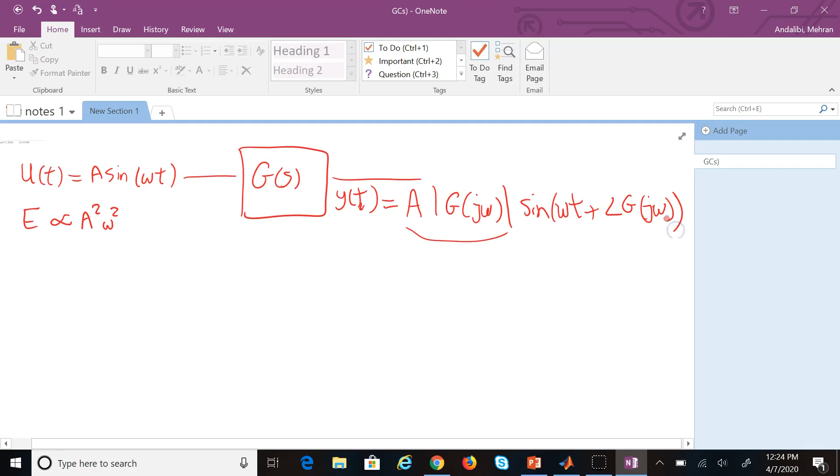We learned that for a linear system, when we pass to it this u(t), if this is G(s), the output y(t) is going to be something of the same frequency. The linear system does not alter the frequency, and the magnitude of the output is the magnitude of the input times the magnitude of the transfer function. It has the same frequency but a modified phase, where the modified phase is the phase of the transfer function at that frequency. So the frequency of the output and input are the same. The only thing that is modified is the amplitude.

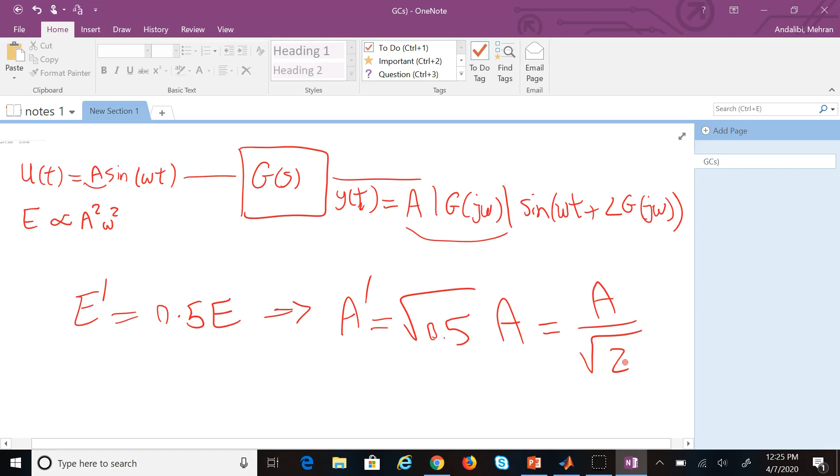So when we say E prime is half of E, it means what? The amplitude prime is how much? How much should you modify the amplitude to make the energy drop by 50%? Well, 50% means 1/2, and since E is proportional to the square, it is going to be the square root of 0.5 times the original amplitude. And the square root of 1/2 is 1 over square root 2. So we can write it like this, and 1 over square root 2 is 0.707. So if the amplitude drops to about 70%, 71%, then the energy of the signal drops by 50%.

So now this number means what? If I take the log of both sides, 20 log base 10 of A prime is 20 log 10 of 0.707 times A. And since this is a product, you can write it as an addition of logs. So it is going to be this plus this. And how much is this value? If you calculate it, this is -3.

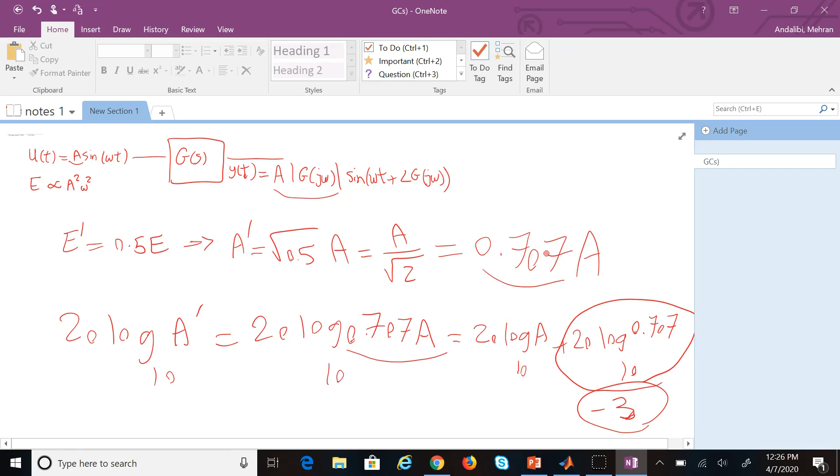So that's why we say whenever the magnitude of the signal drops by 3 decibels, that means the amplitude dropped to about 70%, or the energy dropped by 50%. Okay, so that's why we have this number 3 here. 3 decibels means a 50% reduction in energy.

And so now the terminology: the frequency at which this 3 decibel drop happens, compared to very small omegas, is what we call the cutoff frequency. And the range from omega of almost 0 to the cutoff frequency, this band of frequency, we call the bandwidth. Okay, so that's the definition of cutoff and bandwidth.

And one important thing is the bandwidth is related to other things that we learn about the performance of a system, transient performance characteristics, like what? Like the rise time. So one of the important things is that the rise time and the bandwidth are inversely proportional.

So if you change the behavior of G of S by changing what? The damping ratio. So if I make the damping ratio larger, right? So I am going to make the damping ratio larger. What happens when you make the damping ratio larger? You're raising the rise time. In other words, you're making the system slower, but the bandwidth also increases.

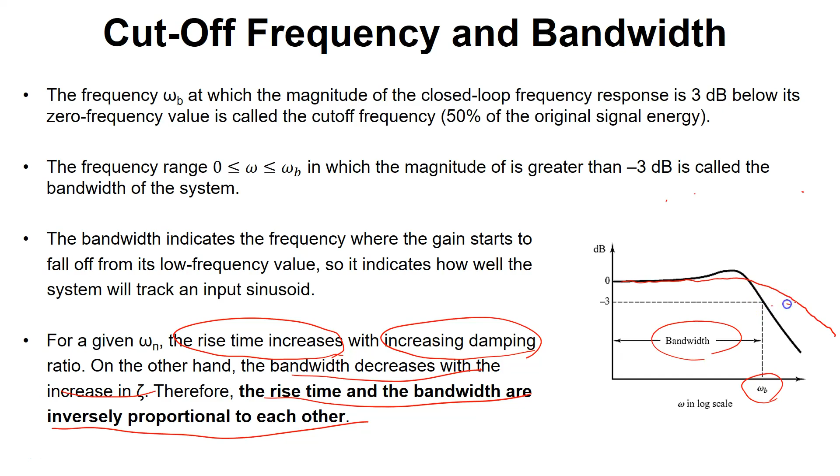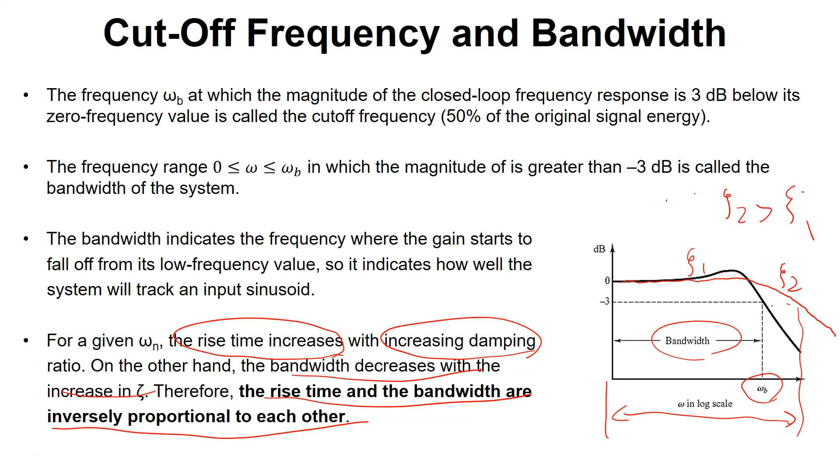So the more damping you have in the system, the bandwidth increases. In other words, this drop happens at a later frequency. Instead of this, it's gonna go like this. And here is where you have 3 units drop, and so that is gonna be your new bandwidth. So if this is zeta 1 and that is zeta 2, I can say zeta 2 is bigger than zeta 1. I added more damping. I could get a larger bandwidth, but at the cost of making the system slower. Okay, so these two are inversely proportional.

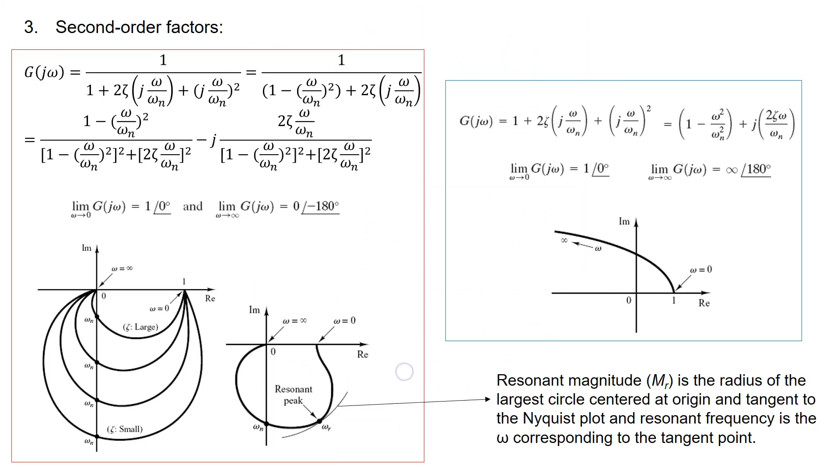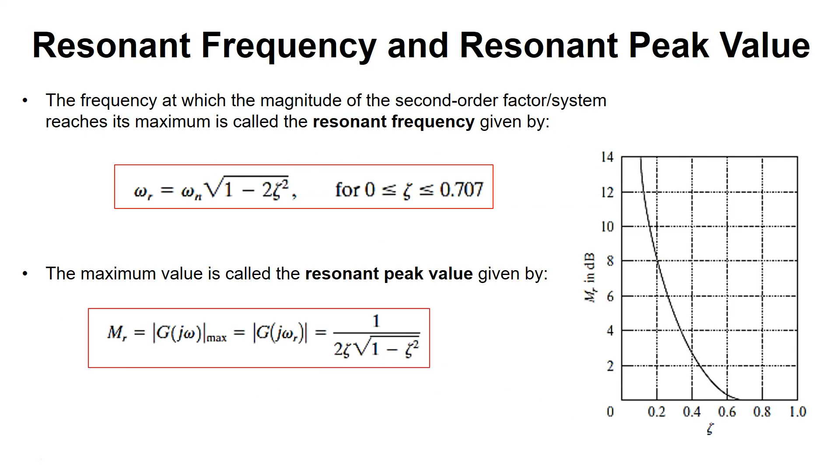Now, how can you get the bandwidth in Matlab? I'll show you. Also, we learned in the past about resonant frequency and resonant amplitude, right? So we learned them, where was that? Here. So we learned about omega r and Mr, resonant frequency and resonant peak value. Is there a way that we can find them also in Matlab for a system? Yes, the answer is yes, we can do that.

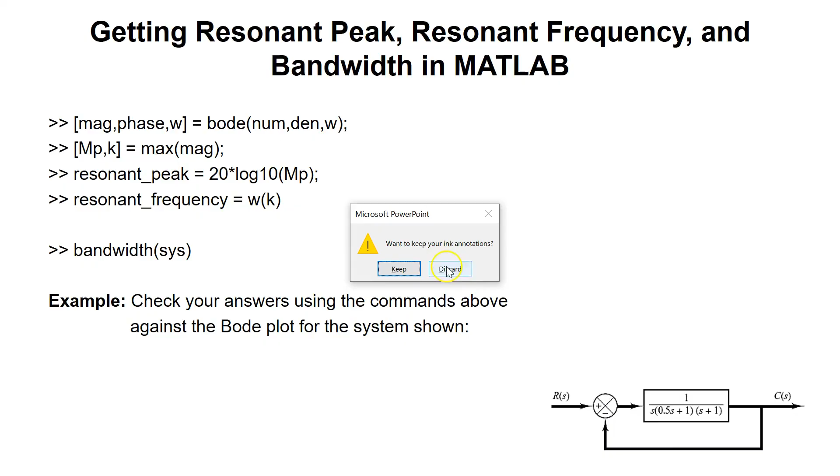And the commands we use is, first, in the past we didn't have it, but now they have added this. There is a command in Matlab called bandwidth, so we can directly apply that, right? So if we look at the system here, s times 0.5 s plus 1 and s plus 1, right? So let's look at this system.

So if we define that transfer function, we say the system is the transfer function of, in the numerator we have 1, in the denominator we have convolution of 2 things. One is s times s plus 1, which is 1, 1, 0. And the other one was 1 and 0.5, I assume, right? 0.5 s plus 1. So I multiplied s by s plus 1, and now I'm multiplying it by 0.5 and 1. So this is the transfer function that we have, and now we can directly run the command bandwidth on it.

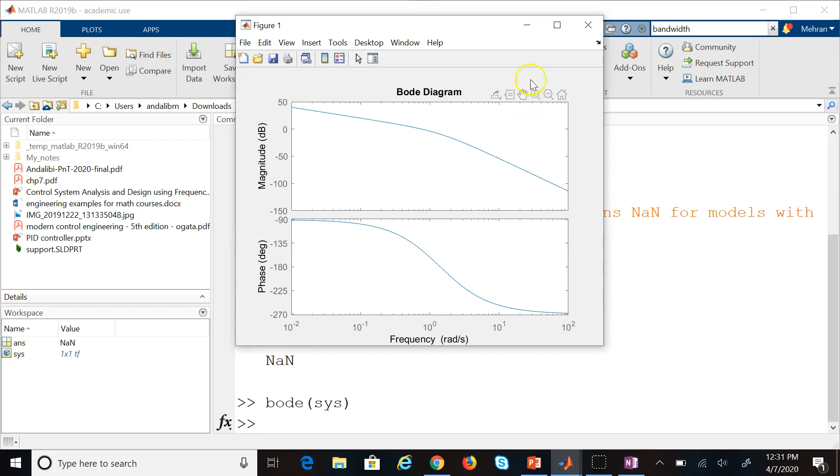And it says the bandwidth is NaN. Okay, that's quite interesting. What does it mean? Bandwidth is NaN. So let's do the Bode command. So we say do the Bode plot of the system. And if we look at the Bode plot, we should be able to find it here. Okay, so this is the Bode plot. It says NaN, but that's not necessarily true.

So let's go back and look at the definition again. It says the frequency in which the magnitude is greater than negative 3 decibels. Okay? Yes, or 3 decibels below its zero frequency value. So if we go back and look at the Bode plot, here we are at something less than 50 decibels, right? Let's go and check it.

So if we use data tips and move the mouse, at low frequencies it doesn't seem to go any closer. That's the closest it goes, for 0.02. So it is like 34 decibels or so, although we can zoom into that area. If we zoom in here, you see that the actual value is like 43 or 42 decibels. So once we go down 3 decibels below it, which is like 39, wherever we are at 39, that should give us the bandwidth. And here you see it's already 34, so the bandwidth is really small for this system.

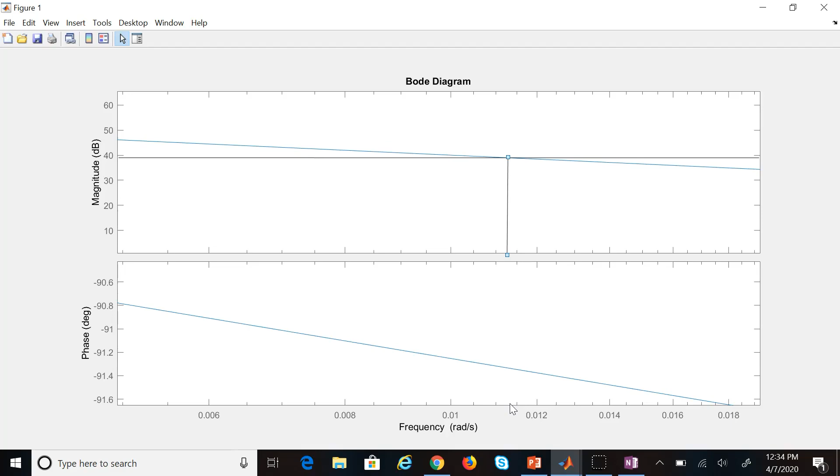So you can use another line and project this down here. And you see this is roughly around 0.011 or so, a little more than 0.011. So that is the bandwidth, okay? So it's a low bandwidth. That's probably why it returned NaN, because it could not zoom in to this. You see that the smallest frequency I had was 0.02 and the bandwidth was less than that, so it could not find it. So NaN here really means I couldn't find it.

But if I change this to something a little simpler, maybe this one, let's see if this one does any better. So if I run bandwidth with this, again, that's NaN. Let me change the transfer function to something different.

There we go. Okay, it's about 2 hertz, right? So if I change it to this transfer function, the bandwidth is 2 hertz. And now if again I do Bode plot for this system and I go find that frequency, go 3 decibels below, you see that at about, that is 1, that is 2. This is roughly at 2 hertz where I dropped 3 decibels below the stationary value. Okay, so this is the bandwidth.

The other thing that you want to learn is finding the resonant frequency and value, and we get those through the Bode plot. Okay, so we can either directly click on the Bode plot and find it, or we can use the max command. So we can use a fine range of omegas, because again, if you look at this Bode plot here, can I find it from here? Absolutely, right? So this is the peak value, and I use my data tip again and try to find it.

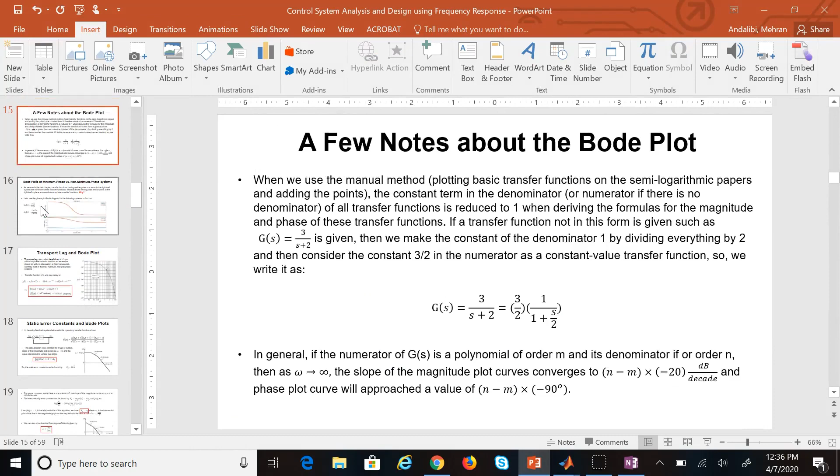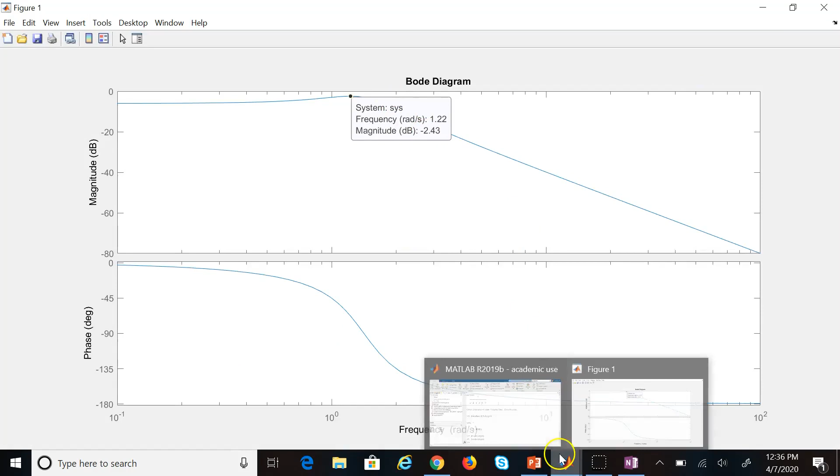So that's not that MR that I showed you here, right? That's MR that you saw here. This MR is without taking log of it. So if I want that value in this system, then I have to convert that decibel, which is -2.43, back into normal. So how do I do it? That's 20 log of that number. So first I divide this number, this -2.43, by 20, and then I raise 10 to the power of that, okay? This is how you go back from decibel to simple magnitudes.

And this is the magnitude, 0.756. So for that system, this MR is 0.756, and I guess from that you can also estimate the damping ratio of that system too, right? Of course, this is a standard second order system, and from a standard second order system you can also calculate the damping ratio, but many times you do not have the analytical model of the system. All you have is a Bode plot that you acquired experimentally. And so from that, then you can calculate all of these numbers and then calculate damping ratio and so on and so forth.

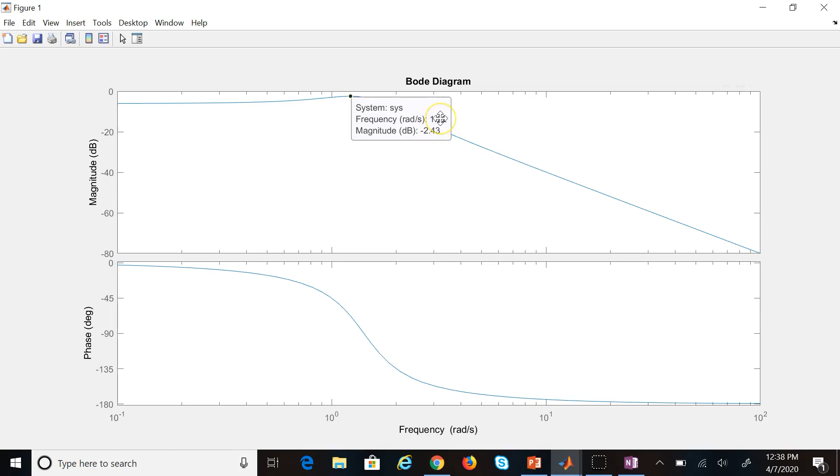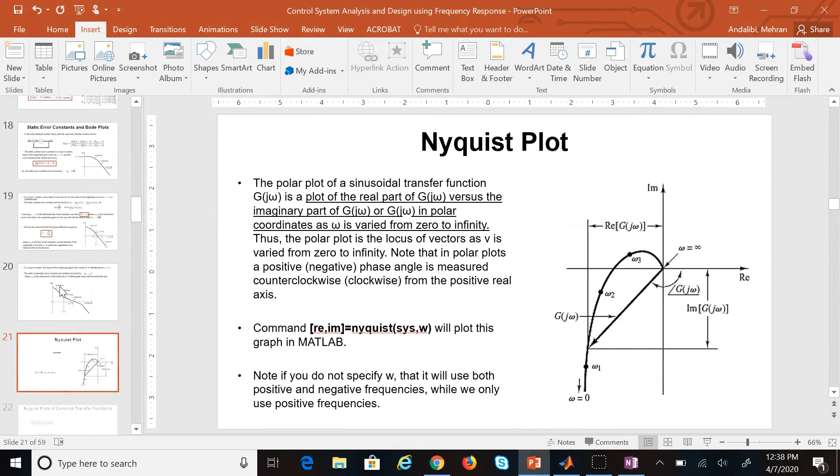So without giving you any physical model, I can just give you a graph, and then from that graph, as I told you in the past, you can obtain a ton of useful information. So that's one way you can get the magnitude and frequency directly from the Bode plots by clicking on it. But what if you want it to be automated without you clicking on the plot? Is there any way to do it through code directly and you do not interfere?

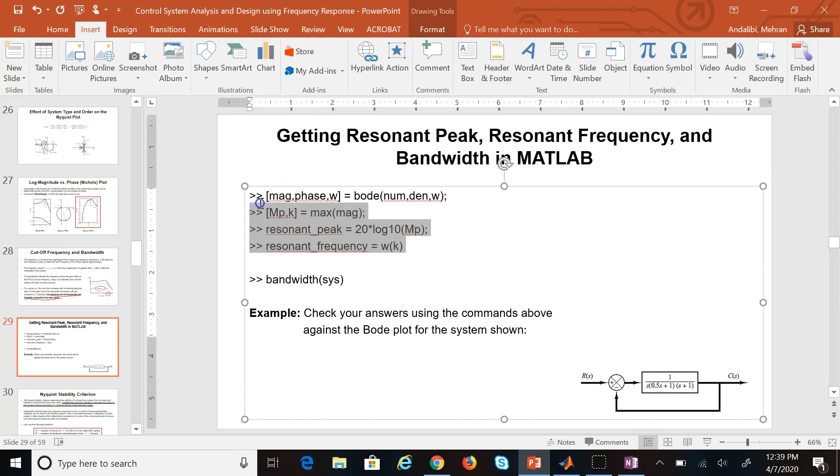Yes. As I said, you define a fine value for vector omega, you pass it to the Bode command and get the magnitude and phase, and then look at the magnitude. Get the max value of the magnitude, and then get the frequency of the magnitude, right? And then omega at which the max is happening is resonant frequency, and 20 log 10 of that amplitude is the resonant peak. So I can easily do that here.

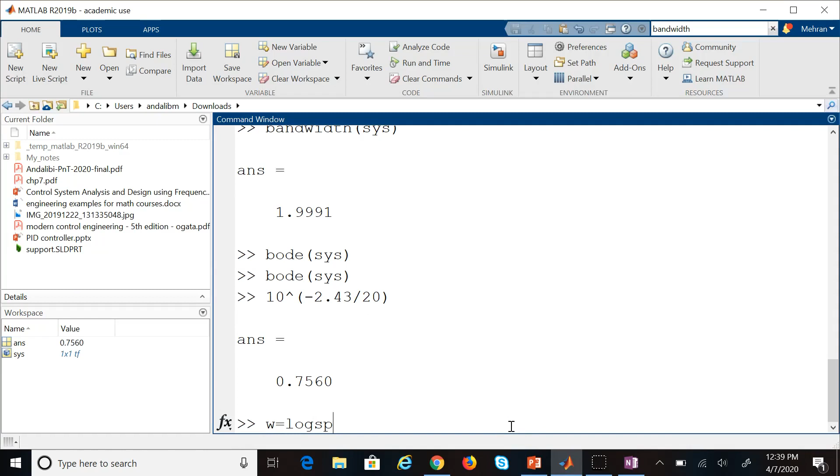And I say frequency is anywhere between, let's say, 0.01, and I can use log space. If you remember, it's better to use log space. So log space of -2 to 2, and maybe 1,000 points. So let's use a lot of data points, and then, oh yeah, there we go. Then here, I already defined the system, so I can use sys and get the magnitude and frequency. And now you run the command max. Now look, I have to remove semicolon.

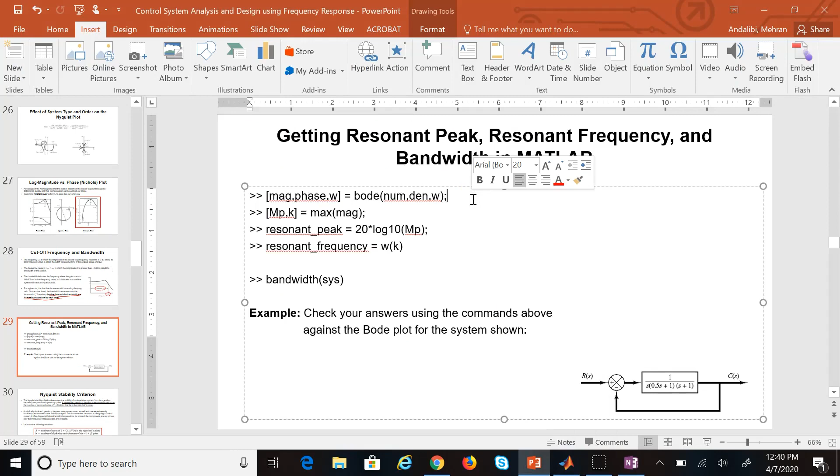So look at that. Resonant peak is -2.43, which is exactly what we found from the Bode plot. And then the resonant frequency is omega at k, which here you can see is 1.219, which is very similar to the 1.2 that we found, okay? So you can do it through this as well, completely automatically. Good. Now that we have seen these topics, let's start Nyquist Stability Criterion.

By the way, before I started, I just added for you this logspace command. I mentioned it in the past, but it's good to see it one more time. And then that formula I just mentioned: if you want to convert decibel to magnitude, that's the opposite of 20 log10. You divide the decibel by 20 and then raise 10 to that power. Okay, so I added that to your lectures.

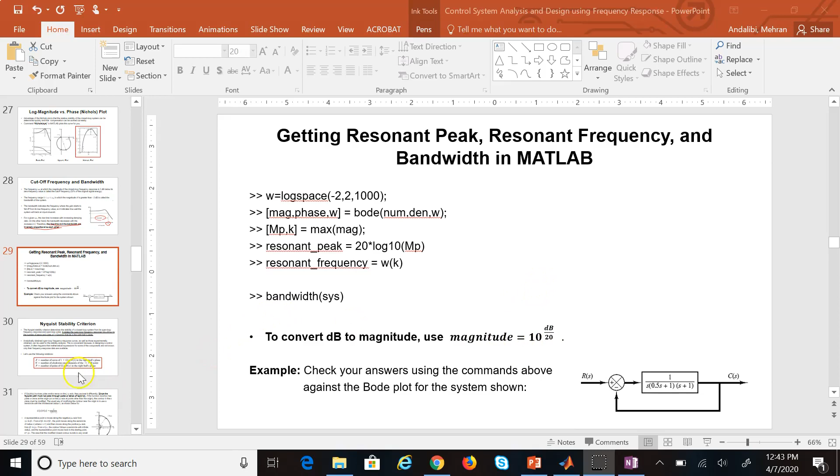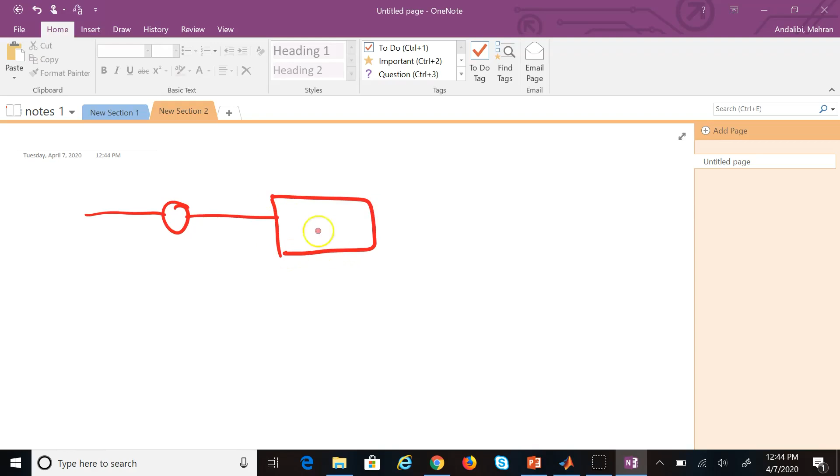So now, what is the Nyquist Stability Criterion? The Nyquist Stability Criterion says this: I can look at the Nyquist plot of GH, which is the open loop transfer function, and I can tell you whether the closed loop transfer function is stable or not. And that is a big thing, right? Because if I have this system where G is the feed forward and H is in the feedback, and this output is Y, the input is U,

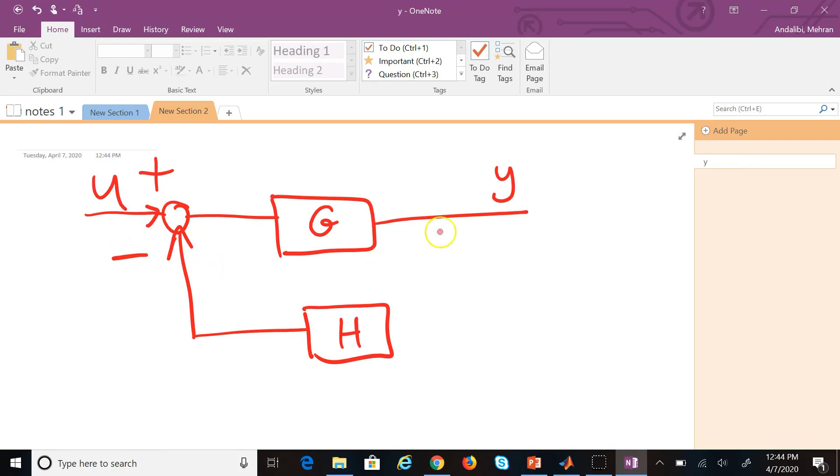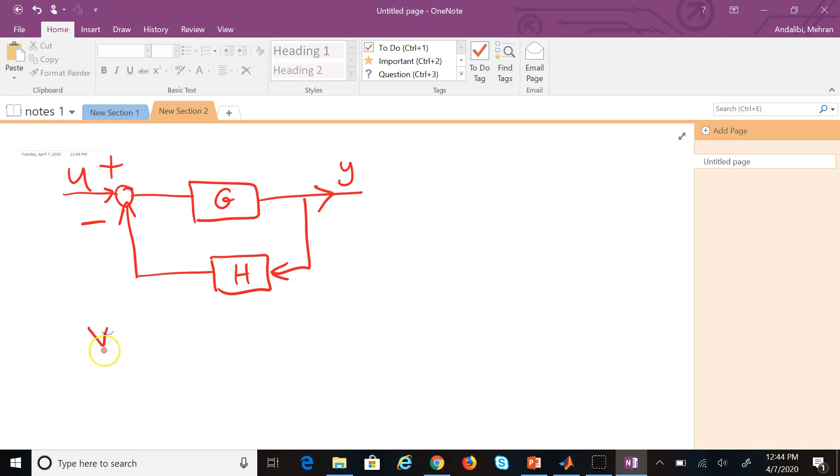then what we really need to know in order to see whether the system is stable or not is Y of S over U of S, which was G over 1 plus GH, right? So I had to look into the denominator of this. When we set this equal to 0, we call it the characteristic equation. And if this characteristic equation has any root on the right-hand side of the imaginary axis, we say the system is not stable. So to determine stability, we have to look at the denominator of this transfer function.

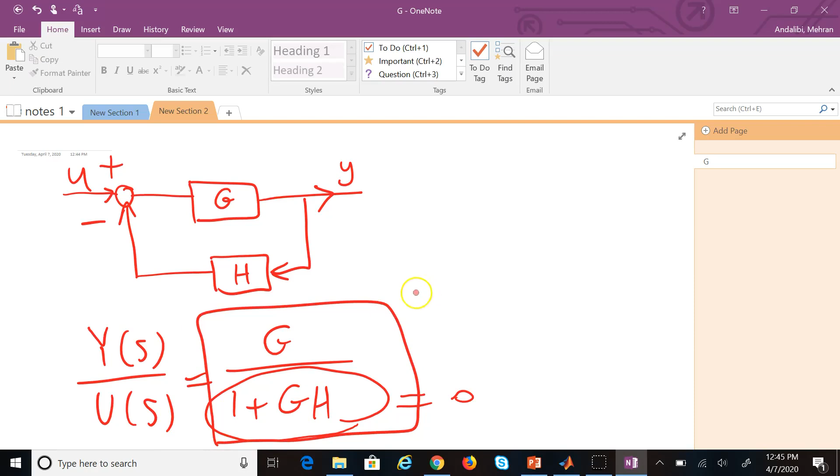And what was this transfer function called? It was called the closed loop transfer function, right? So we have to look at the closed loop transfer function. But now the Nyquist method says you don't need to look at that. All you need to look at is this guy here, G and H multiplied together. If you just look at the Nyquist plot of this, what we call the open loop transfer function, and the denominator of it,

so it's a ratio, it has some poles. If you have the Nyquist plot of that plus the poles of that, I can tell you whether this characteristic equation has any roots on the right-hand side or not. So by looking at the open loop transfer function, you can tell stuff about the closed loop transfer function, and we use the Nyquist plot that we learned. So how does this method work? Well, this is how it works.

What we do is we define a Nyquist contour, and then we map this Nyquist contour into a new plane called the GH plane, and then look at that. So what do I mean by it? This is the part where you need to know complex numbers and mapping of complex numbers. I don't know how in depth you went into complex numbers, but

Good. Now, what does this contour have to do with the Nyquist plot we learned in the past? Well, if you look at this portion of the Nyquist path, this guy on the left side we call the Nyquist path, this is where S is equal to j omega, right? And when I plug S equal j omega into GH of S and plot the polar plot of that, what do we call the polar plot of GH of j omega? We call it the Nyquist plot.

So the Nyquist plot is the projection or the mapping of this radius here. What about this one? What does this one do? What is S over here? S here is also J omega, but omega here is what? Negative. Omega for the top portion is what? Positive. Remember I said that we do not really use negative frequencies in this course until we get to the Nyquist Stability Criterion, which is here.

So this portion is again the same as the Nyquist plot, right? Because we plug in S equal J omega into GH, correct? But we do it for negative frequencies. So I would get again a Nyquist plot, but for negative frequencies. And it turns out that the Nyquist plot for positive and for negative frequencies are the same as each other except for a mirror image.

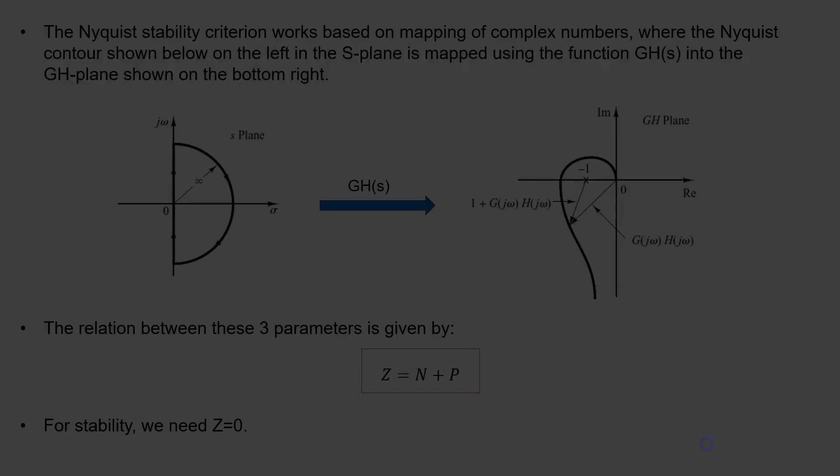So if we have this contour, the entire contour could look something like this. This is one real example where this is the Nyquist plot of this transfer function, this is the Nyquist plot for negative frequencies, and the big arc is mapped to the origin. So this is the GH plane for that system. Looking at that, can I tell whether the closed loop system is stable or not? First, let's learn some terminologies.

Nyquist says, let's call the number of poles of GH on the right side of the S-plane P. So the open loop transfer function has so many zeros and so many poles. How many poles of GH are on the right hand side?

We call those P. We show it with parameter P. N is what? N is the number of times this mapped version of GH in the GH plane, this contour, is encircling this specific point -1 and 0. How many times do you think that contour is encircling this point in a clockwise manner? Right now, this point is outside this contour, so this contour has never encircled that point. So N here is what? 0.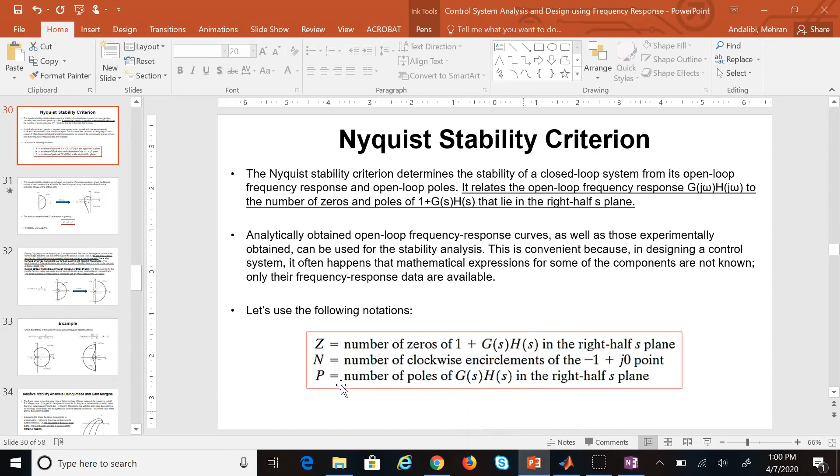What is the condition for the system to be stable? Yes, I want Z to be 0. I do not want any root on the right hand side. I don't want a positive number for Z. Now, how can I find Z based on those two other parameters, N and P? N was the number of clockwise encirclements of the specific point -1 and 0, and P was the number of poles of the open loop transfer function, which I can just look and find out.

It says Z is equal to N plus P, and there is a ton of proof behind this, of course, but right now we just accept that Z is equal to N plus P. If you want more proof, you can always refer back to your textbook. So now, if I go and look at this example with you, there are two systems here.

For the system on the left, how many poles of GH do you see on the right-hand side? Where are the poles for this system? The first pole P1 is at -1/T1, and pole 2 is at -1/T2. Clearly, none of them is on the right-hand side. They are both negative. Here we assume the T's are positive numbers. So there is no pole of this open loop on the right-hand side. So the parameter P in this case is what? 0, none.

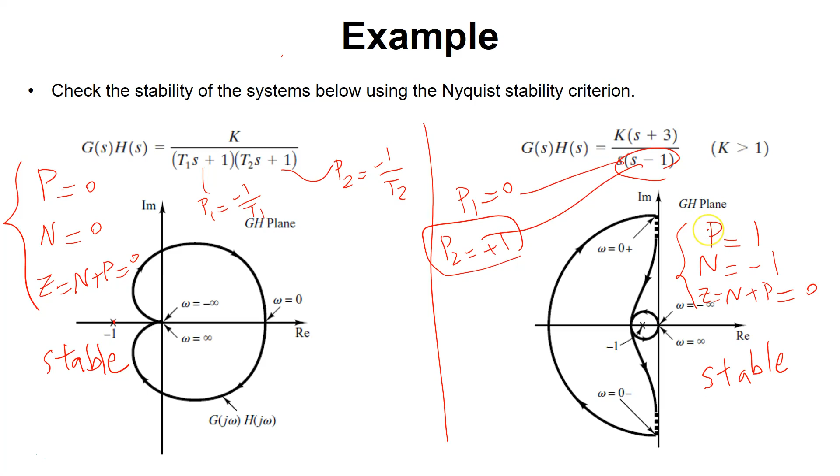We have to do what for this system? We have to form G over 1 plus GH and then look at the roots of this guy and see whether this one has any roots on the right hand side. That is instability, not just GH alone. Here this one that is added would change everything. Okay? Because it brings the denominator of that and will add it to the numerator and will completely change the polynomial. Okay, so please keep that in mind.

Again, one last time, the GH alone does not determine stability. It's 1 plus GH that does determine the stability, and the number of zeros of that, when I say zero, I mean root. Let's not confuse you. The number of roots of that on the right hand side is z. If z is positive, then the system is unstable. For both of these cases, the system is stable.

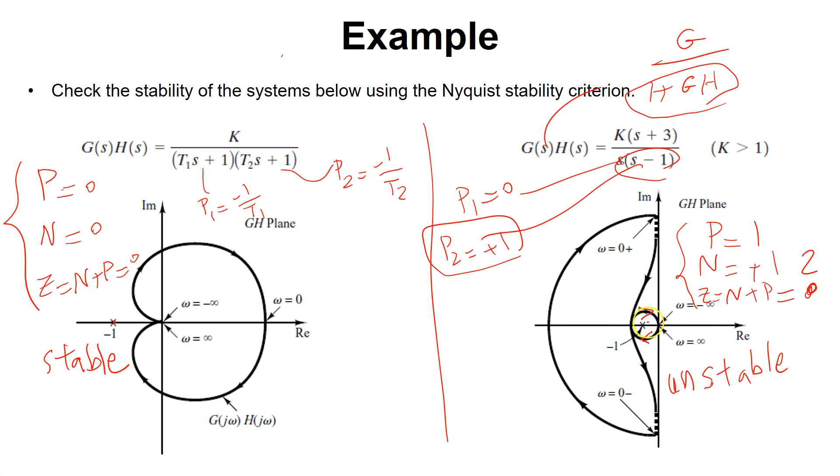But let's say if when we did this GH plane, the direction of the circle was this direction. If it was, then n was what? +1. And so this one was what? +2. And then the system was what? Unstable, right? So the direction of this contour and the way that it encircles this specific point, -1 and 0, does matter. Now, a couple of more things.

One thing you might wonder, why out of all the points on the S-plane or GH plane, why is it that this point is such an important point? Why should you not encircle that point only? What about the other points? Where do you think that point -1 comes from, just intuitively? That comes from the fact that I am relating GH, the open loop, to what? The characteristic equation, which is what?

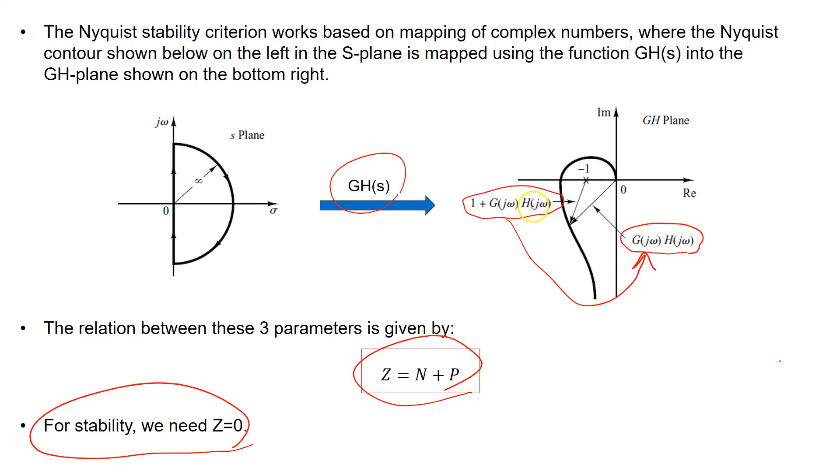1 plus GH. What relation exists between these two? How can I convert this to that? How can I convert the closed loop characteristic into open loop? All I need is to add it with the complex point -1 plus 0j, right? If I add -1 to this, the -1 and 1 cancel, you get this one.

That's why you can clearly see that when this is the G of j omega and this is the point -1, when I add these two vectors together, this one and this one, I get my vector related to the characteristic equation, and so encirclement of this point is so important.

Again, if you want more detail on where this formula comes from and more about the mapping and everything, you can refer back to your textbook, but you need to know mapping of complex numbers. If I get some time after I'm done with this lecture, if I have a few minutes, I'll do a very short example of mapping of complex numbers for you. Okay, so I mentioned that.

Now, one specific caveat that you have to pay attention to is this, that the Nyquist contour, this guy here, should never pass through the poles or zeros of GH, right? So this GH, as I said, has zeros, so it's k times s minus zero number 1 times s minus zero number 2 all the way to s minus zero number m, divided by s minus pole number 1 times s minus pole number 2 times s minus pole number n.

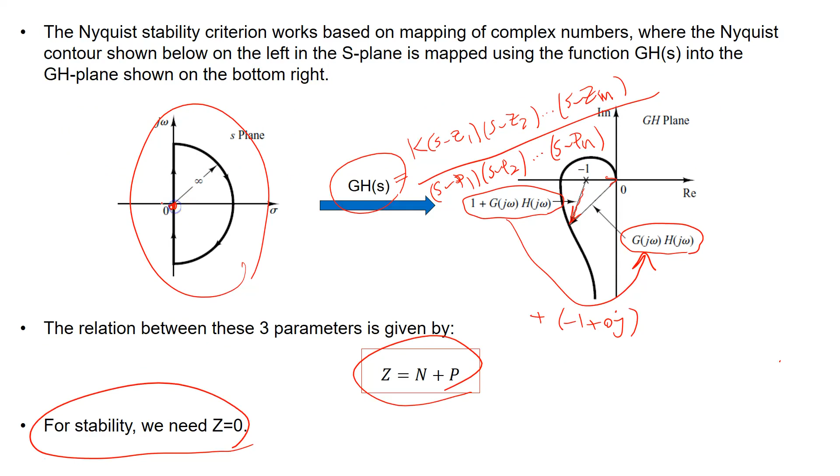So this contour should never pass through any of Z1 to Zm or P1 to Pn. By no means should it pass through any of them. And you might say, well, what if it does? Like, for example, if my GH is this transfer function and it has a pole at what? At 0. Well, 0 is here and here is on the Nyquist contour. So how can I bypass that and not pass through it?

So I modify the Nyquist contour by a very, very small semicircle around that pole. So I do not pass through it, I bypass it, by drawing a what? A very, very small semicircle around it, where the radius of the semicircle, I call it here epsilon, and that epsilon is actually going to 0. So it's a negligible thing. And that way I avoid passing through it.

And so now you might wonder, okay, how does it affect the GH plane? Well, this portion of it is the same as the Nyquist plot, no change. This portion of it is again the Nyquist plot for negative frequencies. This big arc, we learned that this one will go to what? Will be mapped to the origin.

So what about this small circle? Well, this small circle is the opposite of the big circle. I can easily show that because the system is causal. If s goes to 0 instead of infinity, then this small arc here is mapped into what? This giant arc.

Where the radius of this giant arc is what? Infinite. Okay, so this small arc will be converted to this giant arc with an infinite radius. And so now you can combine all of those four curves together and get your GH plane. Okay, so that's one thing.

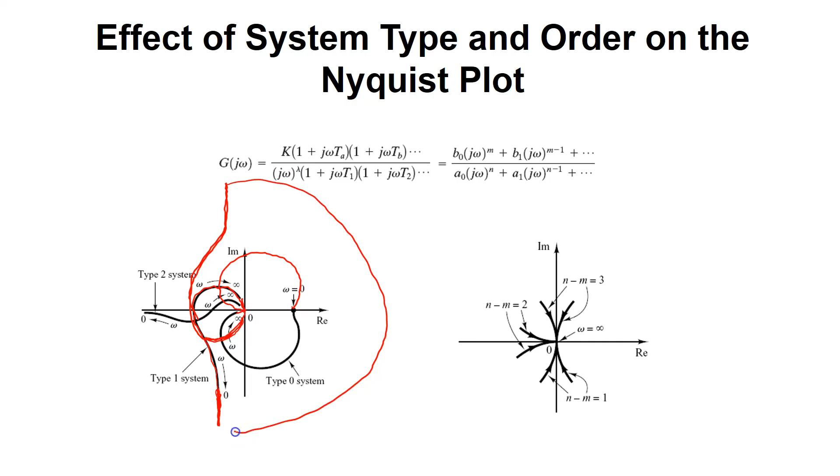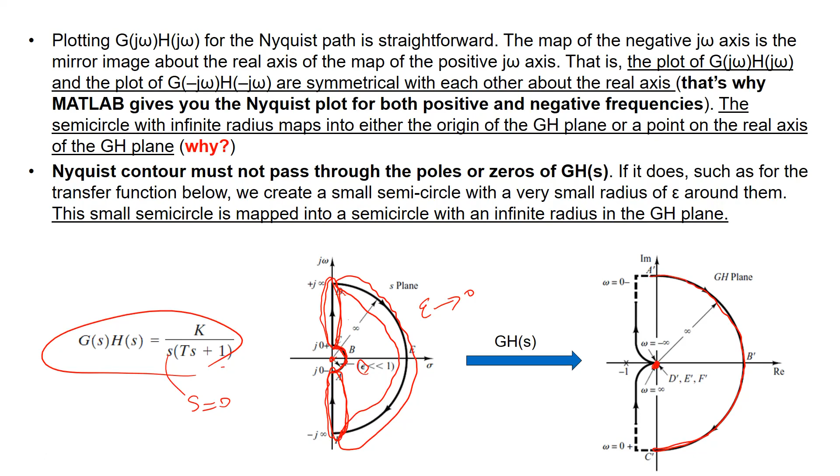But now, if you look, this curve formed by positive and negative omega for a type 1 system is not completely closed. But when I add that small curve, which is now converted to this huge radius, it will look like this. So now you have this shape here, or something like that. So it will be entirely a closed contour. All that matters is that this is a closed contour.

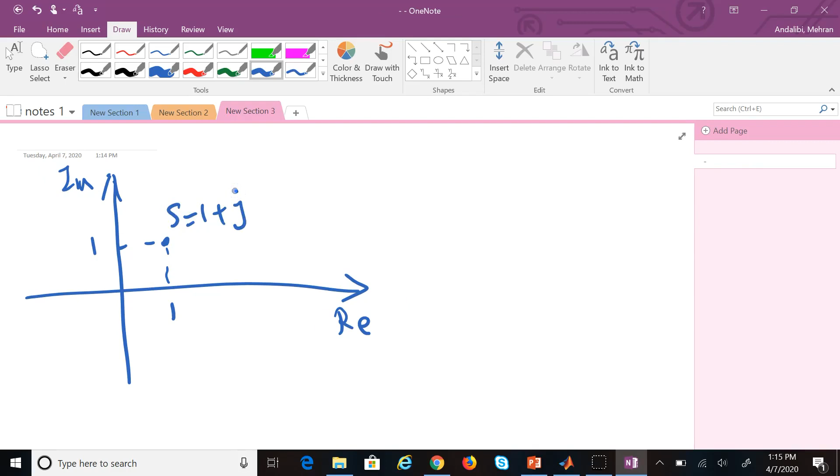And now I use a function GH, which is 1 over s times s plus 2. And I want to know what would happen to it in this new plane, which I call the GH plane. So this is the S plane, this is the GH plane. All I need to do is plug this S into that function. So what is GH of that point? Just plug it in: 1 over 1 plus j times 1 plus j plus 2, which is 3 plus j, right?

And if you simplify this, you can use Matlab if you want. So it's 1 divided by 1 plus j times 3 plus j, and that is 0.1 minus 0.2j. So it is going to come here. Yes, so that point is GH of S. And similarly, if I have more and more points, I can project them here, here, here, and then this contour will be mapped to this contour.

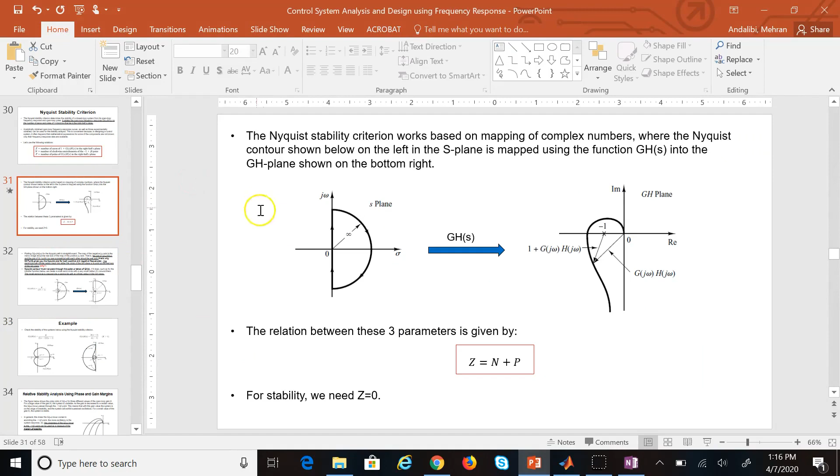Okay, so this is called complex number mapping. What we do for stability is we use this contour called the Nyquist contour, convert it into the GH plane, then use the encirclement of the specific point, look at the poles, and then decide whether the closed loop system is stable or not.